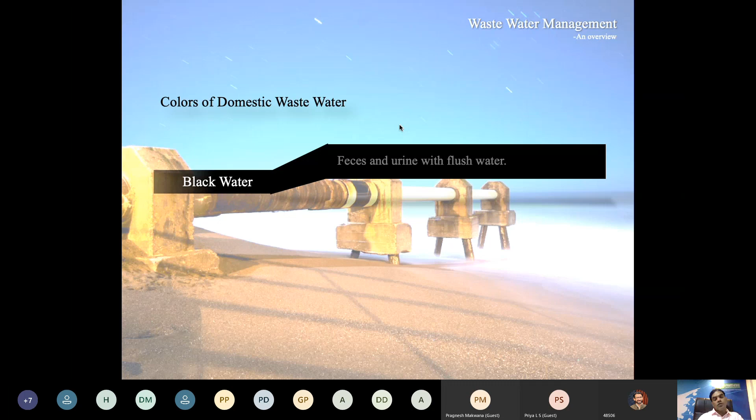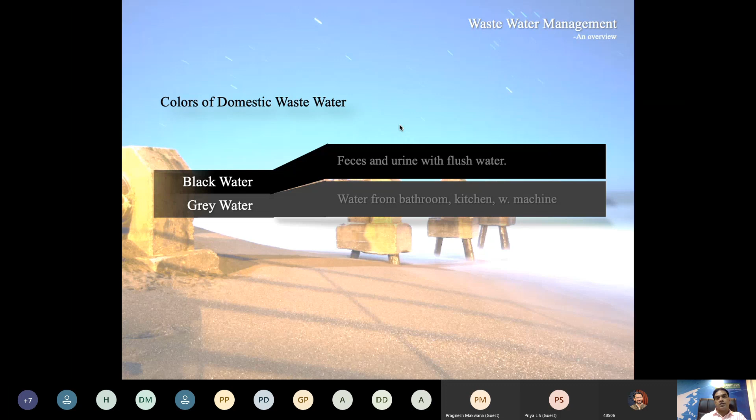These are the types of domestic wastewater. First is black water, which is nothing but WC water, wastewater that comes from the WCs. Then grey water, which is water from the bathrooms, kitchens, and washing machines, basically utilities. Then comes yellow water, urinal water from urinals. Then brown water, which is black water without urine or yellow water. In an STP or treatment of wastewater, we treat all these things - black water, grey water, yellow water, and brown water - everything in the STP commonly.

Whereas as per NAINA authority, the new authority in Panvel area, as per their restrictions, we have to treat black water and grey water separately. Whereas in BMC and other areas, all this water is treated together in the same sewage treatment plant.

See, these are the levels of domestic wastewater parameters: BOD, COD, organic nitrogen, ammonical nitrogen, total nitrogen, phosphorus, total solids, and suspended solids.

If you see these figures, these are strong, medium, and weak.

Whereas to design the plant, we always consider some ballpark figure, like the two important figures are BOD and COD. We always consider BOD in the range of 300 ppm and COD in the range of 600 to 700 ppm to design the plant as an average value of strong, medium, and weak.

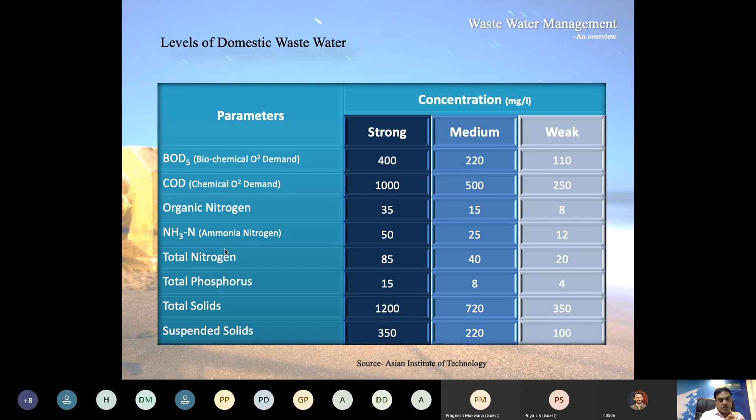Now, what is COD and BOD? Why have we taken only two parameters? The reason is these are the only two parameters which are very essential to treat. If you treat COD and BOD, everything can be taken care of easily and automatically.

First is COD, chemical oxygen demand. It is the measurement of chemical in the water that can be oxidized. What we are doing in STPs or treatment of wastewater is treating it with the help of bacteria, growth of the bacteria, that is nothing but oxidization. So COD is the total chemical present in the water which can be oxidized, which we are oxidizing in the STPs.

Whereas BOD is biochemical oxygen demand, which measures the amount of food that bacteria can oxidize. This is the real BOD which we oxidize in the aeration tanks or MBBR tanks with the help of aeration and giving proper oxygen to the bacteria.

As far as measurement is concerned, COD can be measured with a very simple method in any laboratory, in just 2 hours. Whereas BOD will take 3 to 5 days. There are two types of BOD measurement: BOD 3 days and BOD 5 days. But normally, to get the exact figure, always go for the BOD 5 days. That is the reason when we give any sample to any laboratory, it takes a minimum of 5 days to get the results, because BOD itself will take a minimum of 5 days for measurement.

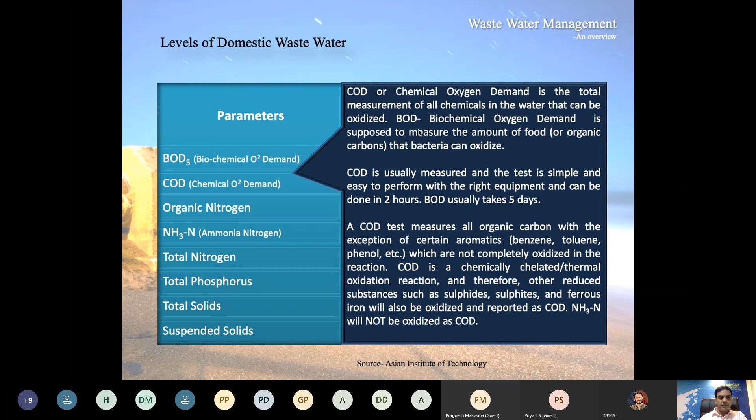Now, wastewater problems in India. Our country is having problems all the time.

Speaking of Mumbai alone, we have almost 77 lakh 30,187 people who don't have adequate sanitary facility. These people who live in slums generate around 1739 MLD of wastewater per day. Again, there is a norm of 225 liters per day per person. The disposal of this untreated domestic water is a huge task.

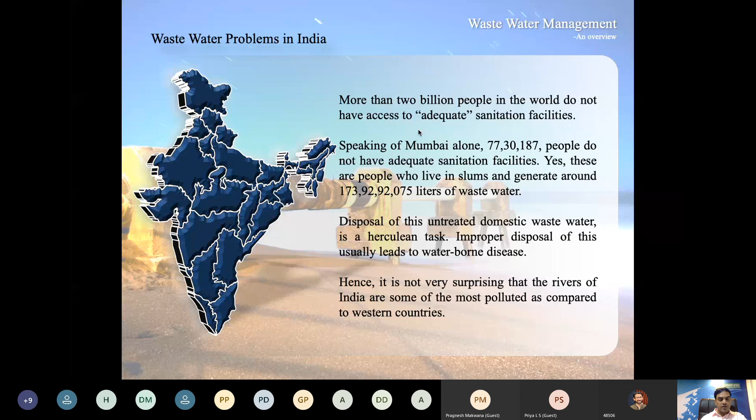Improper disposal usually leads to waterborne disease. All these slums don't have a proper drainage system, so there is no treatment. All this water goes into nalas and rivers, and ultimately that contaminates us and creates a lot of diseases.

You can see the pictures. This is a river, a nala.

India lacks infrastructure. As per CPCB estimation in 2006, India generates 33,212 MLD of sewage per day. But we installed only 6190 MLD of sewage treatment plants across the country. So we are treating only 20% of the wastewater generated; the remaining 80% again goes through these nalas and rivers and all.

Even this treatment capacity is confined to bigger and more powerful towns of the nation, like New Bombay and Bombay, where a lot of STP plants came up, because the New Bombay corporations and big corporations have a lot of funds. So they can put big STPs, lay bigger combined pipelines, and take it to common sewage treatment plants. Whereas in smaller cities, they don't have funds and proper infrastructure, so again there is a big problem.

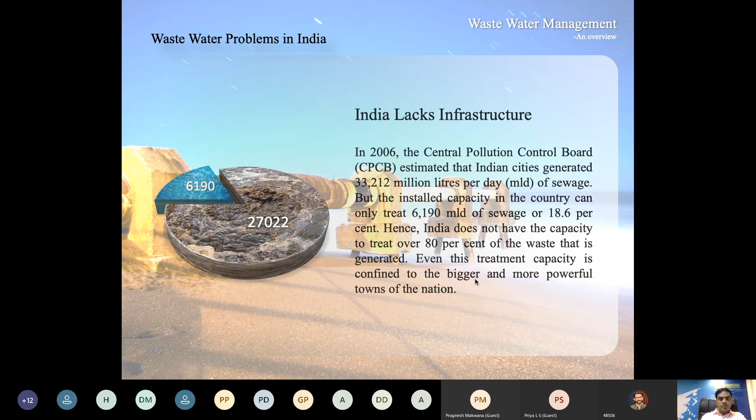Again, this is one more big problem: unavailability of correct data. No one really knows how much sewage is generated. It's very surprising that after 1947, after freedom, after 75, 80 years, we don't have perfect data on which to design the system.

It is well known that 80% of all the water consumed by a city is released as untreated wastewater. So it should be easy to calculate how much wastewater is generated by simply looking at water consumption. Unfortunately, that doesn't work in our case. The government estimates 70 to 80% sewage generation of the total water supplied, as a thumb rule.

For example, BMC only provides 90 liters of water per person for domestic purposes, and the remaining water you are forced to arrange on your own, and you probably wouldn't have control over that.

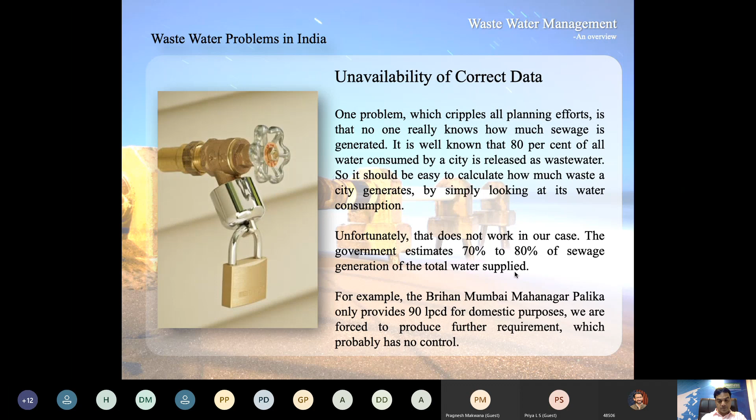It's a case study. According to Delhi Jal Board, the city generates 2947.8 MLD sewage in 2005. This was based on the quantum of water supplied. But when CPCB measured wastewater flowing through Yamuna, it found the discharge is 3684 MLD, which is 700 MLD higher. So both Delhi Jal Board and CPCB are government firms, but they don't have proper data, and data is also not matching to each other. The difference is 700 MLD. It's a very high figure.

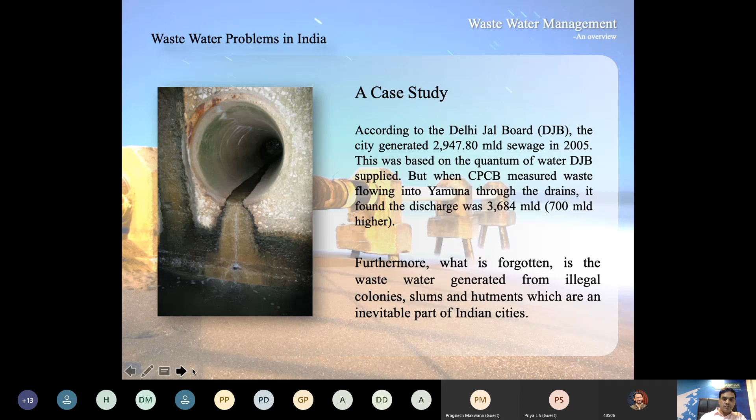Deteriorating infrastructure. The problem is further complicated when we realize that installed treatment facilities like septic tanks and STPs do not actually end up treating the wastewater. This is a common problem now. In a study conducted along with the BMC, it was found that majority of the septic tanks used were either not working well or just functioning as sewage collection tanks. The reason is a septic tank needs to be cleaned every 6 months or 1 year, but nobody bothers about that. So it gets treated as a collection tank, and after overflow, we pump it out. There is a lot of smell and sewage flowing through roads.

Problem number 3. Majority of the toilet blocks use septic tanks due to unavailability of street sewers in the vicinity of slums. By this, I don't mean that septic tanks do not work. In fact, septic tanks are a very good option in the absence of municipal street sewers, but only on the condition that they were constructed properly and used according to the guidelines laid down for them. In slums and everywhere, septic tanks are there, but they are not properly designed or maintained. That is again creating a lot of problems like health diseases and environmental issues.

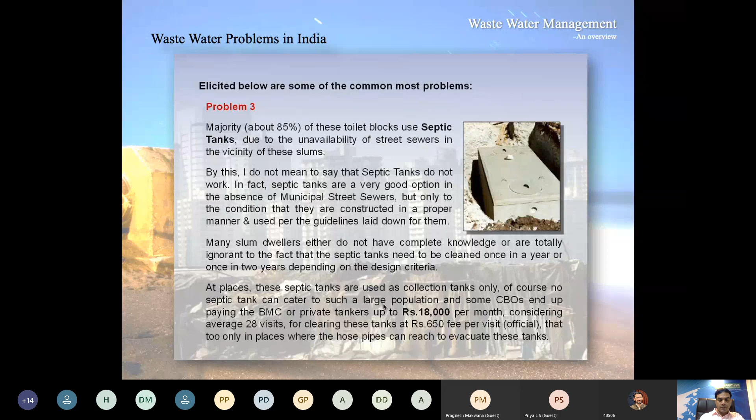STPs are usually located where land is available. As a result, sewage has to be transported long distances from the source of generation and collection to the treatment site through a conveyance system. In short, electricity is used to run the pumps for this. Also, most cities lack a functional drainage system to convey the waste. It is equally important to note that the longer the distance, the more the cost of conveyance. The infrastructure available in STPs includes laying the pipeline, operating the system, spending on operation like electricity and manpower, and maintaining it for a longer time. After a particular time, you have to again repair or refurbish it. That is also a lack of infrastructure.

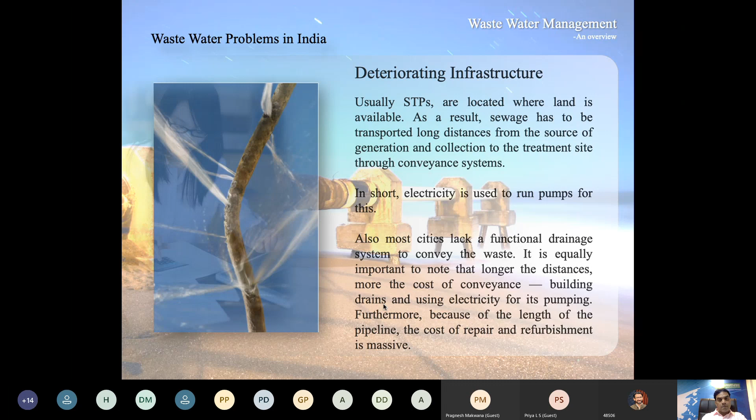You can easily understand with this arithmetic. Sewage generated across India is 33,212 MLD. Capacity to treat available is 6190 MLD. Actually treatable is 4469 MLD, which is 72%. So 28,743 MLD is not treated. The annual cost of treatment of 6190 MLD sewage is approximately 135 to 677 crores annually. The capital cost required to build STPs for the remaining untreated water, that is 27,022 MLD, is 7,566 crore, considering 28 lakhs per MLD as the approximate capital cost. 7,566 crore rupees is a big figure, and to arrange these funds, plus the annual cost of treatment which is around 700 crores, it is very difficult to maintain these centralized systems.

So what we always recommend is to go for decentralized systems. Decentralized systems can be easily operated and maintained because they are operated by society, corporates, or industries.

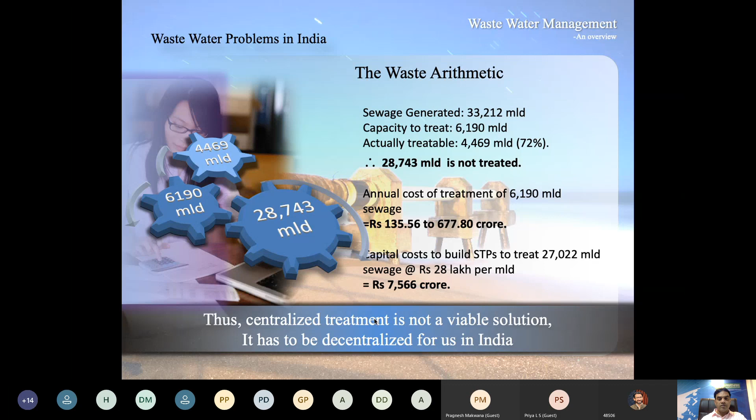So we're coming up to the different systems available for the treatment of sewage. As far as decentralized systems are concerned, first is the septic tank, which is commonly known to everybody. It is the most commonly used wastewater treatment for low-cost housing applications, since most septic tanks can cater to a population of up to 300 people. It's often confused with cesspools, and it works on the principle of anaerobic microorganism digestion.

This is a septic tank, as you have seen. First, sewage comes in by gravity. There are two baffles, and it passes through the baffles. In the first phase, the sewage sludge sediments, and semi-clear water flows through to the next chamber for further sedimentation.

This is a common septic tank figure. We have to remove this sedimentation or sludge on a regular basis, like 6 months, 1 year, or 2 years, depending on the load.

And finally, it goes to a soak pit here. This is again a big problem. If we don't have a proper soil strata which can soak this sewage, then it doesn't soak the sewage and it comes back, and the septic tank overflows. So while designing the system, we need to take proper care of the design of the system, the soil strata, the location of the septic tank, and the removal of sedimentation or sludge on a regular basis. Otherwise, it doesn't work properly.

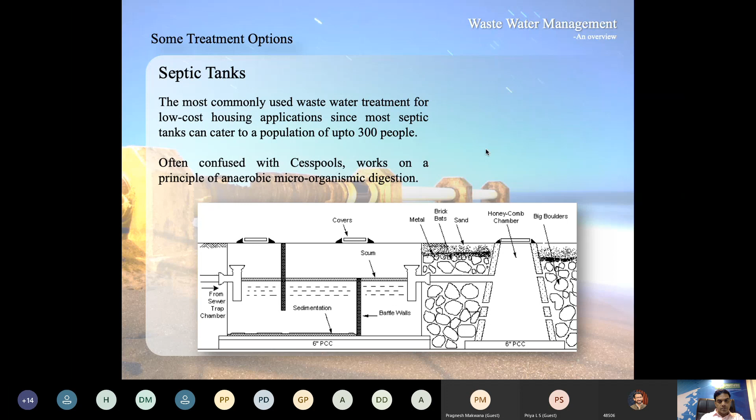Septic tank advantages: this is a very age-old established technology, underground so invisible, not visible. Pathogens removal is very good. No power supply required - this is the most important point, and it's working very nicely. The reason is it doesn't have any operating costs, especially in slums and low cost areas. It's very effective because they cannot afford to pay for operators, power supply, chemicals and those things.

Negatives: treatment is only primary. If you are supplying a BOD of 300 at the inlet of the septic tank, at the outlet you will get approximately 150 BOD. Whereas in other STPs like MBBR and other aeration systems, inlet is 300 and outlet is less than 10 ppm, which can be used for flushing. Whereas septic tank outlet we cannot use for flushing or any other purpose because it is only primary treatment.

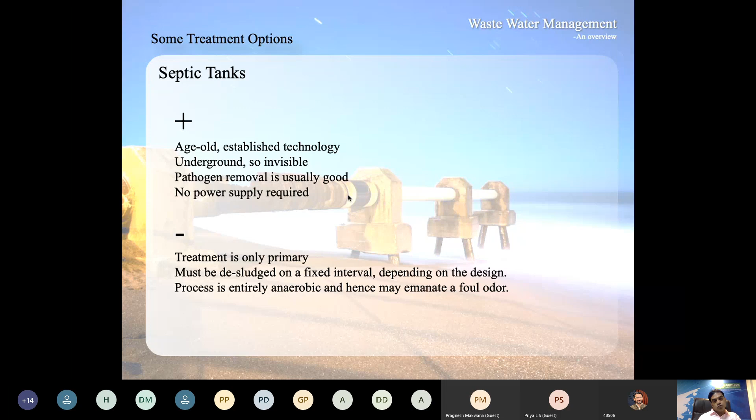It must be desludged at fixed intervals depending on the design. This is very important, otherwise it creates a lot of smell and overflow. The process is entirely anaerobic and hence can emanate a foul odor - this is an anaerobic system. All the bacteria are anaerobic bacteria. Treatment is completely anaerobic, that is the reason there are chances of foul smell if it's not maintained properly.

Then comes a very old conventional system called DEWATS. DEWATS is based on different natural treatment technologies put together in different combinations according to the need. I'll explain.

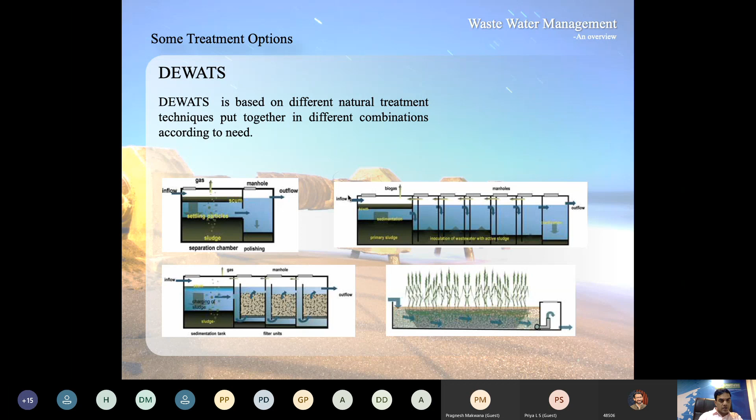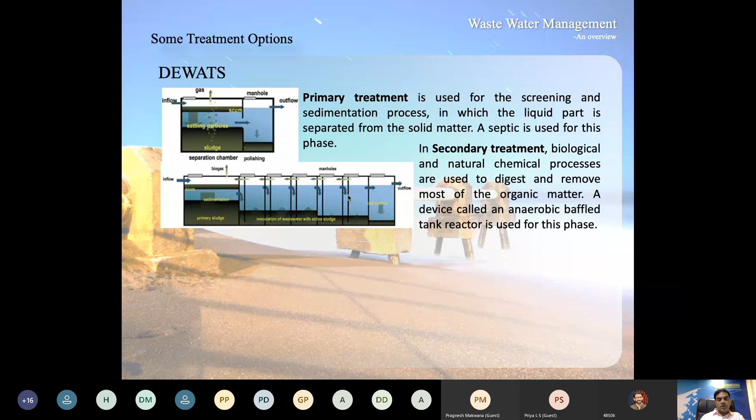In DEWATS, first is primary treatment, used for screening and sedimentation process, in which the liquid part is separated from the solid matter, and a septic tank is used for this phase. In secondary treatment, biological and natural chemical processes are used to digest and remove most of the organic matter, using a device called the anaerobic baffled tank reactor.

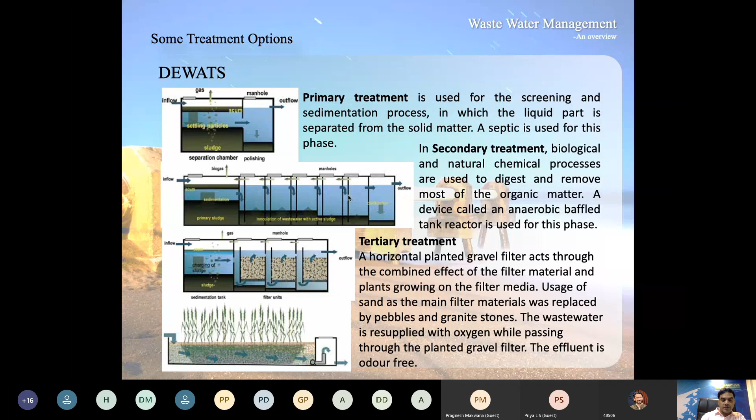Tertiary treatment is a natural system, so instead of a sand filter and carbon filter, there are natural gravel filters that work through a combination of different layers of sand and semi-clay. Water passes through pebbles, granite, and stones, and through this process the water gets cleared. This video will help you easily understand how the DEWATS system works.

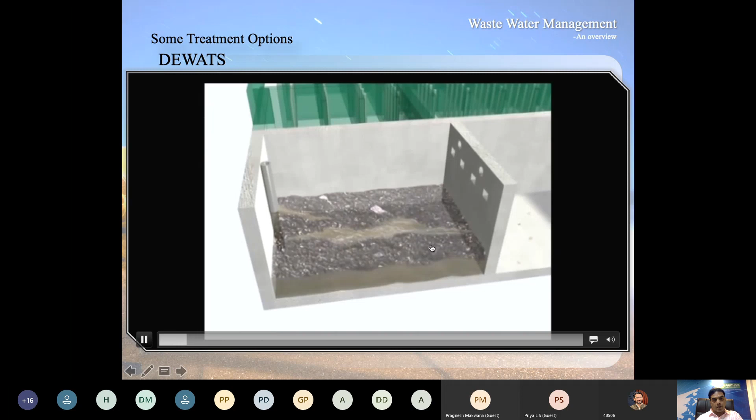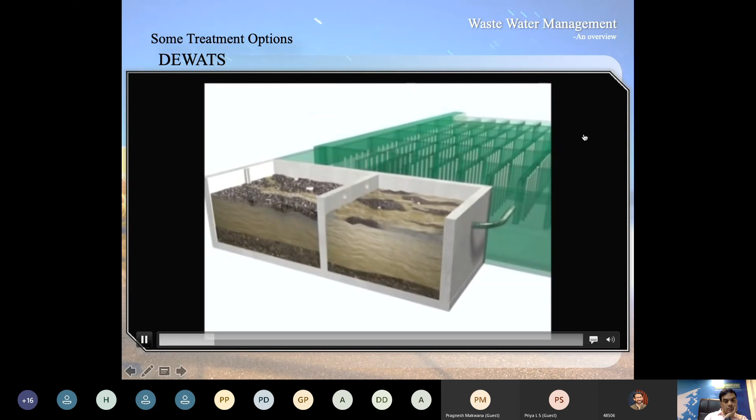The first stage is the settler tank. Here the contaminants are retained by flotation and sedimentation, which happens through natural separation of heavy particles. The heavy particles sink down and lighter particles float.

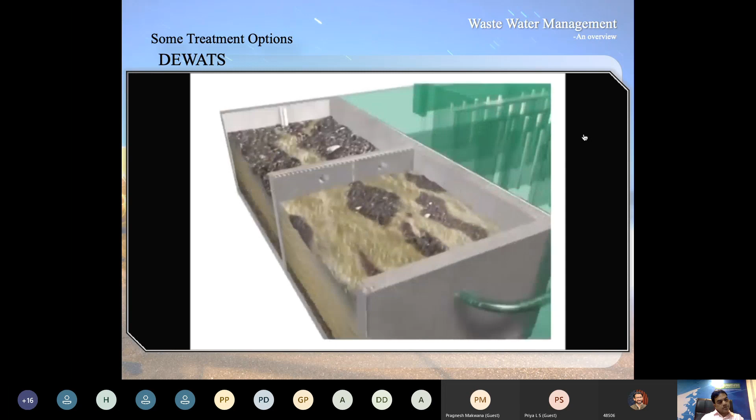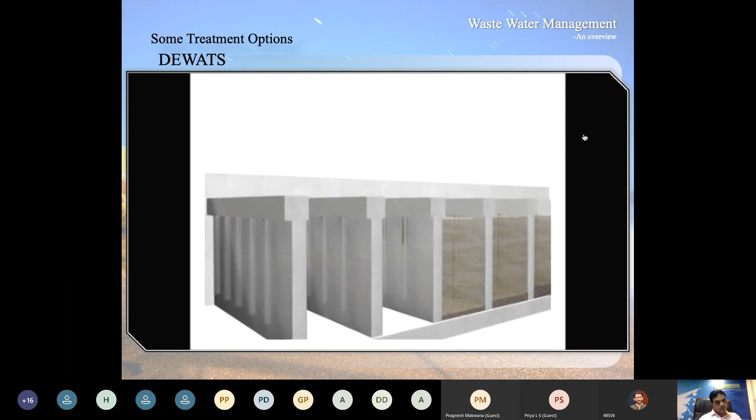Second stage is the baffled tank reactor. In these tanks, anaerobic treatment takes place based on metabolism of specialized bacteria, which transform the organic pollutant into bacterial matter. During this process, the fresh effluent is mixed with an active sludge blanket deposit of microorganisms occurring naturally at the bottom of the chambers. During this progression, the accumulated sludge is gradually reduced. At this stage, average BOD reduction is about 75%.

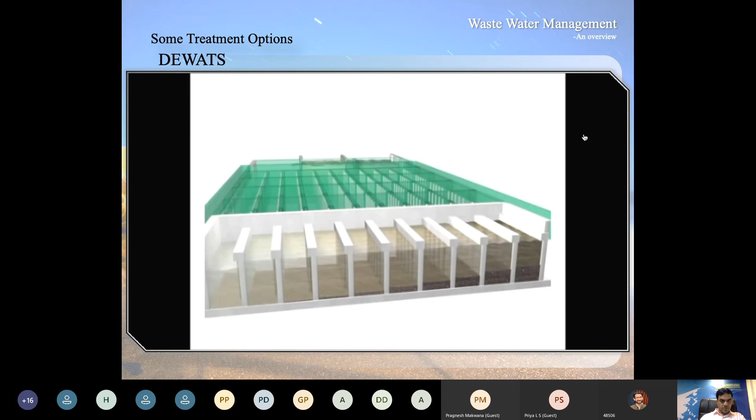What are the advantages of DEWATS? High treatment efficiency, customizable as per the treatment requirement, beautiful landscaping possible - this is very important, no waste water above ground, no nuisance of water. Basically, these DEWATS systems are very good and useful where a lot of land is available.

These are the negatives: high space requirement, 30 square meters per cubic meter of daily flow - 30 square meters for 1 cubic meter of daily flow. Costly if desired gravel is not available, because since it's a gravity filter, it needs a very high quantity of media. Intensive maintenance and supervision is required during the first 2 years.

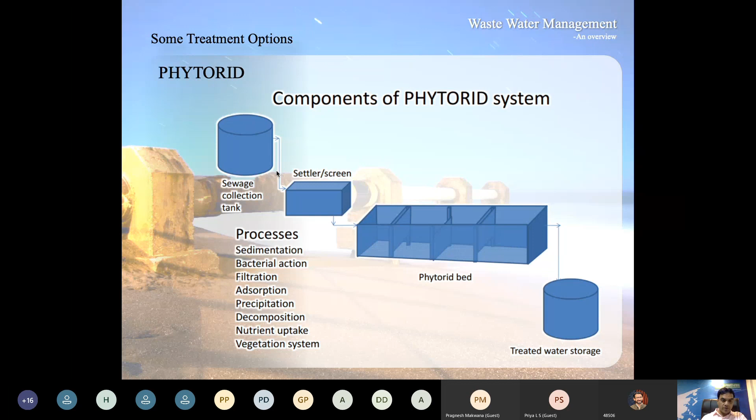Another technology which is natural and very good is Phytorid technology. These are the components of the Phytorid technology. The processes are: sedimentation, bacterial action, filtration, adsorption, precipitation, decomposition, nutrient uptake, and the vegetation system.

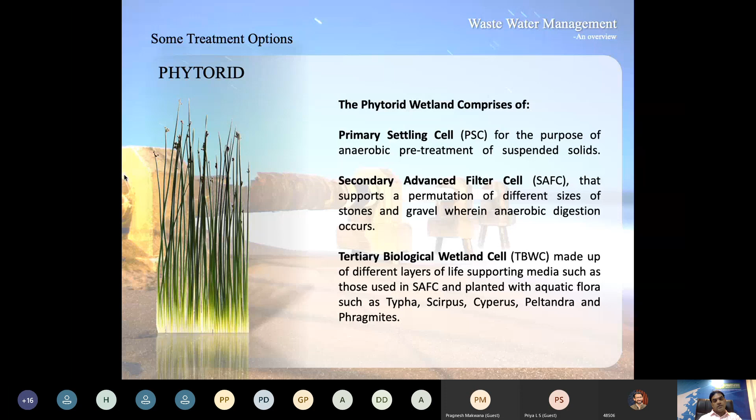This phytorid wetland comprises a primary settling cell for the purpose of anaerobic pretreatment for suspended solids, a secondary advanced filter cell that supports a permutation of different sizes of stones and gravels wherein anaerobic digestion occurs, and last a tertiary biological wetland cell made up of different layers of life-supporting media, such as those used in SAFC, and planted with aquatic flora such as Typha, Scirpus, Cyperus, Peltandra and Phragmites.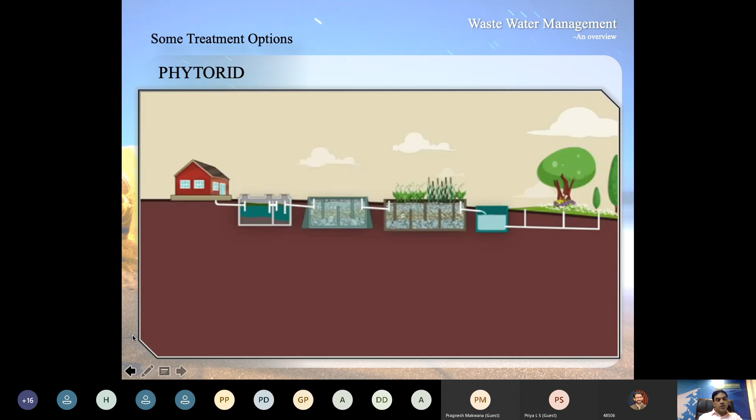You can go through this video so you can understand better what the phytorid system is. This is the primary cell, this is the secondary filter cell, and this is the tertiary biological wetland cell. These are some plants they planted above these gravels.

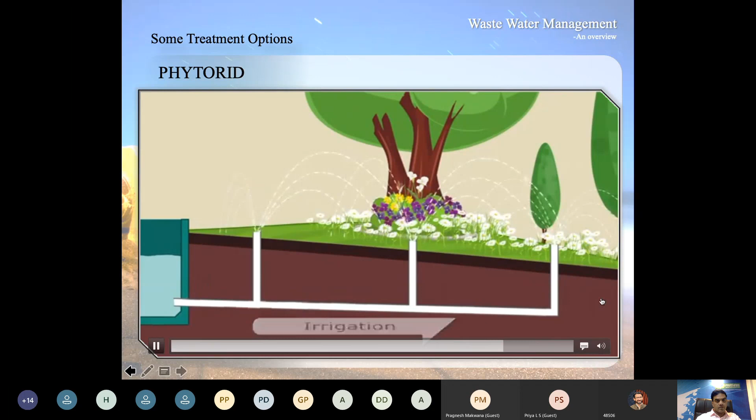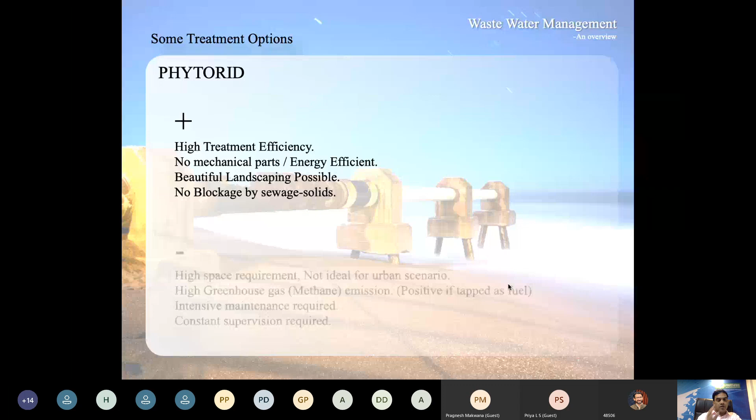I told you the advantage is high treatment efficiency. No mechanical parts, complete, no pumping at all. Everything is natural, so energy efficient. Beautiful landscaping possible, no blockage by sewage solids.

Negative point, or disadvantage you can say, is high space requirement. Again, it's a natural system, so there's no mechanical pumping, so you need more space. Not ideal for the urban scenario, especially areas like Bombay and metropolitan cities.

High greenhouse gas, methane emission. We have to keep a close watch on this methane gas emission, and we have to control it. Otherwise, it can create a problem.

Intensive maintenance required. Constant supervision required.

Then comes soil biotechnology, you can say SBT. The soil biotechnology system consists of an impervious containment, typically 1 to 1.5 meter below ground.

Organic wastewater is processed in an ecosystem consisting of soil-like media. This is media: bacterial cultures, geophagus earthworms, natural mineral additives, and select plants. Natural mineral additives are used as a process regulator in order to achieve desired treated water quality, which is nothing but, you can say, cultures. We normally call them cultures in normal language.

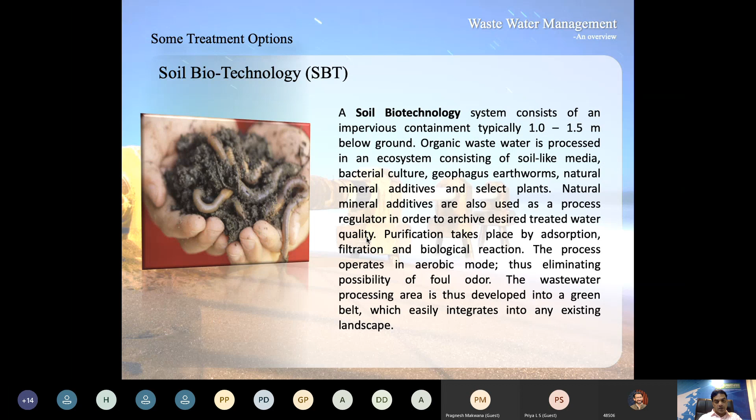This composition of patented soil biotechnology: first is plantation as indicators of plant's health. Additives, that is high performance enzymes, we are adding it. Cultures, microorganisms, media, specific mineral, rock, stones, soils. So all this wastewater passes through these 4 layers and then comes out as treated water.

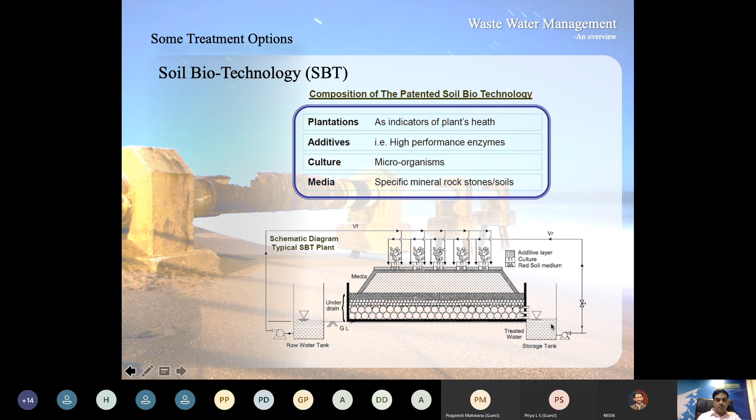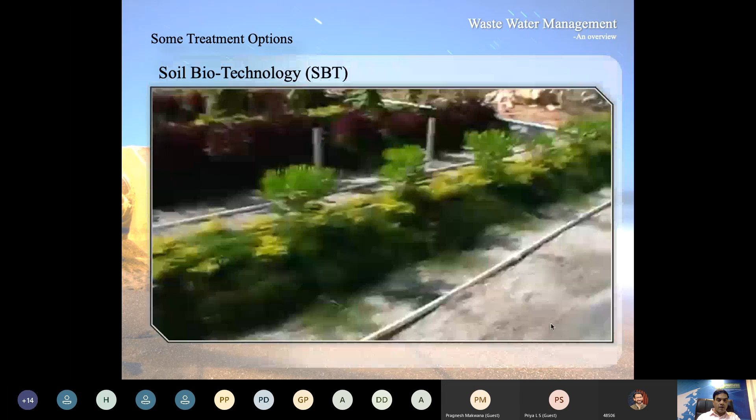This is the common schematic flow diagram of the soil biotechnology. You can see this. In keeping with the theme of decentralized development, a new wastewater treatment technology is on the horizon, one that may hold some of the answers. Soil biotechnology sewage treatment plant is an indigenous wastewater treatment process that uses nature's processes to purify water.

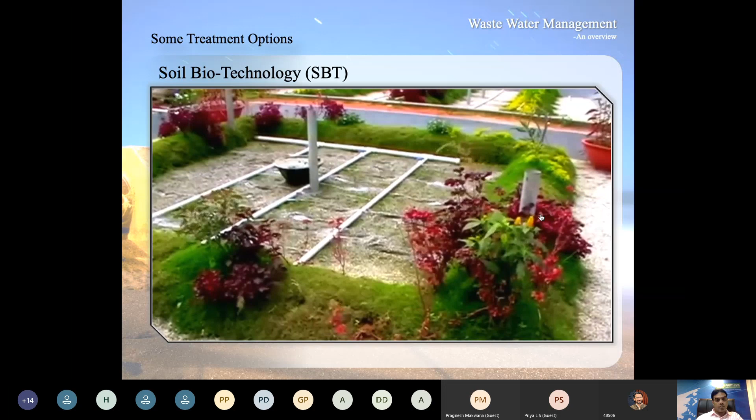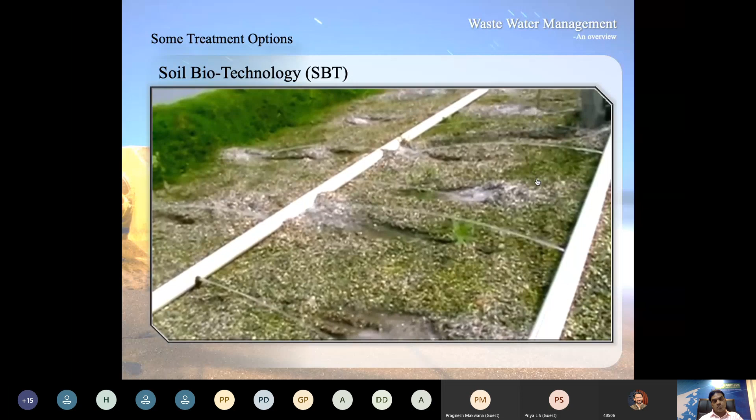Professor H.S. Shankar and his associates from the Chemical Engineering Department at the Indian Institute of Technology, Bombay, developed this technology. The institute has also received a patent for this technology from both the US and the Indian patent offices.

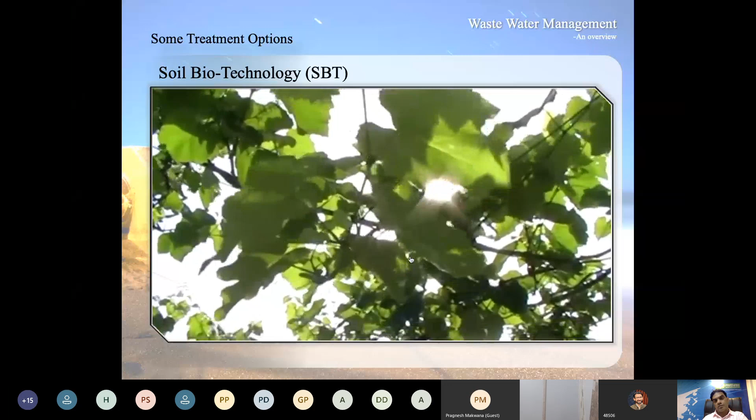Here, nature's fundamental actions of respiration, photosynthesis, and mineral weathering purify the water. The filtering equipment of a soil biotechnology plant is called a bioreactor. The construction involves digging of a trapezoidal trench which is reinforced with riprap.

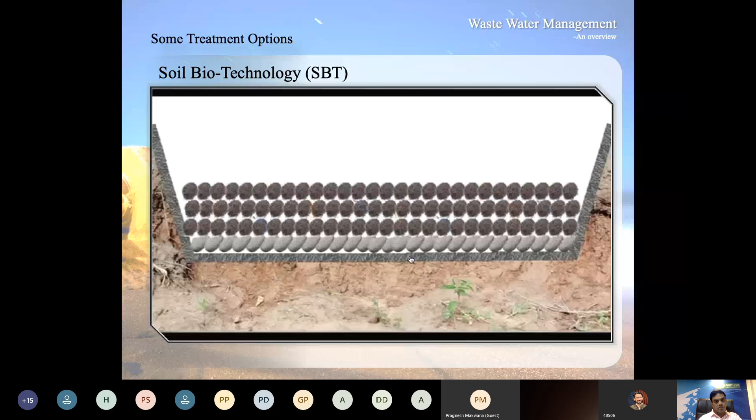A layer of rubble is added, above which a proprietary culture of soil, earthworms, and bacteria are added and covered by another layer of rubble. Over this, rows of plants are laid, in between which rows of pipes are laid. The sewage water is sprayed through the pipes and is filtered as it trickles down this bed.

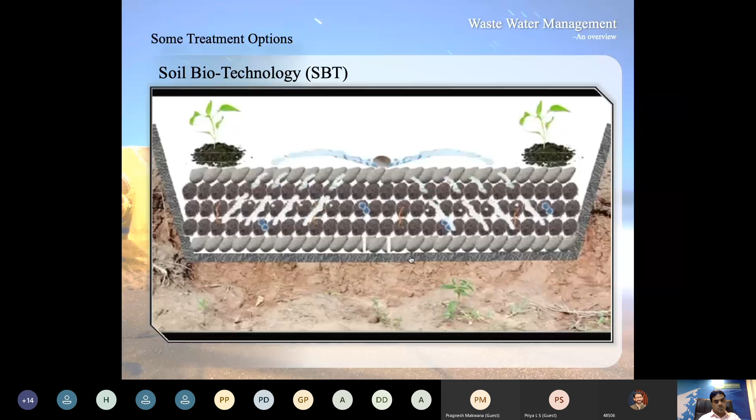Positives or advantages of the SBT technology: high treatment efficiency, again low carbon footprint as compared to other technologies like DEWATS. Low energy consumption since there is no pumping, it's completely gravity flow. Beautiful landscaping possible, as you see in the video.

And disadvantages are: open system, hence some odor may be possible. Distribution lines can get clogged, which need to be cleaned regularly. Regular maintenance required, both flora and fauna of the system need regular supervision.

This is one more technology, SIBF, solid immobilized biofilter, is nature's way of handling wastewater and based on ecological engineering. SIBF houses the ecosystem developed for the specific requirement of wastewater treatment.

The wastewater is processed by this ecosystem, which converts the impurities trapped in the biofilters into stable components, followed by a polishing tertiary treatment. The final treated water meets the pollution control norms and can be used for gardening, irrigation, construction, and toilet flushing purposes.

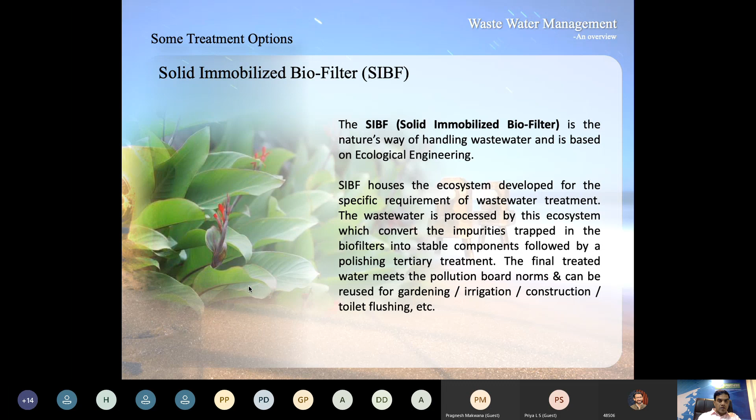This is the complete flow diagram of this system. You can see here, for primary treatment, you can say screening and all. We're pumping this sewage to biofilters, biofilter 1, then biofilter 2. This is the tertiary treatment.

This is the collection tank, biofilter 1, then pumping, biofilter 2, and then this is the alum tank for coagulation, and this is a tertiary treatment of sand filter and carbon filter.

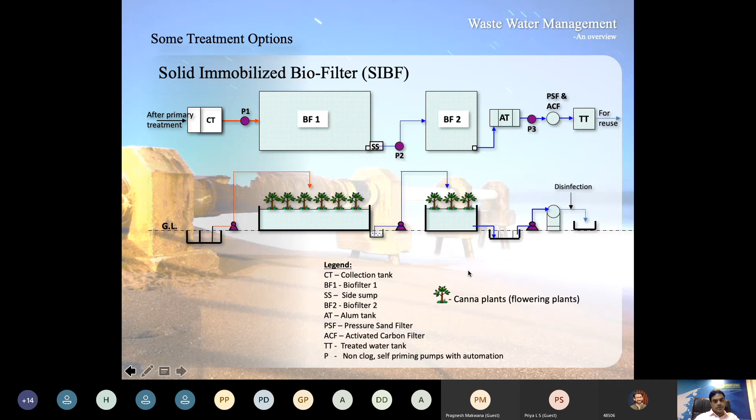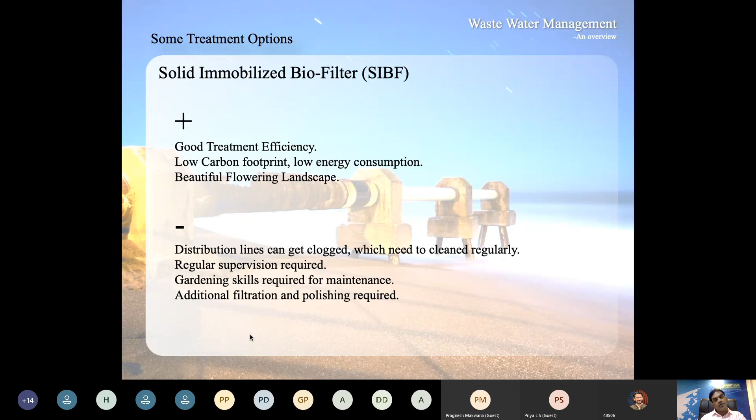The advantages of SIBF technology are good treatment efficiency, low carbon footprint, low energy consumption, and a beautiful flowering landscape. Disadvantages are that distribution lines can get clogged and need regular cleaning, regular supervision is required, gardening skills are required for maintenance, and additional filtration and polishing is required, as we have provided sand and carbon filter there, as well as disinfection at the tertiary treatment.

Now we are coming to systems which are majorly used in decentralized systems, especially in cities like Bombay and major metropolitan cities, where land is the biggest problem. We have always provided the smallest area possible for the STPs. We don't have space even for a small car. So land cost is very high. That is the reason all these decentralized systems are very, very important, especially for the region of Bombay and the metropolitan cities.

The first technology is membrane bioreactor, popularly known as MBR technology. This MBR is designed to produce high quality treated water from wastewater. It is available in standard and customized modules to treat domestic sewage and industrial effluent. Basically, this is membrane technology. The treated water available through this MBR is crystal clear water, as good as drinking water, because it passes through semi-permeable membranes, which are very costly.

You can see this video. This is basically a Singapore-based video. The total Singapore is operating on NEWater, which is completely recycled water from the sewage.

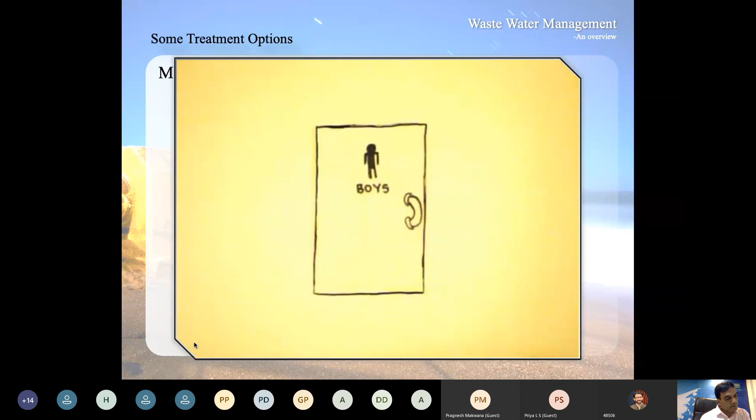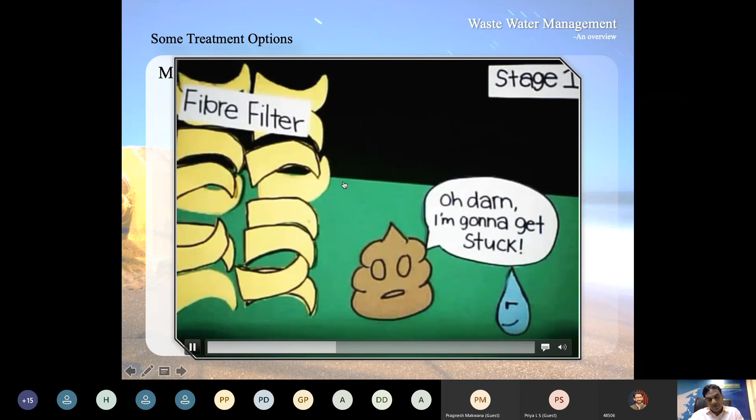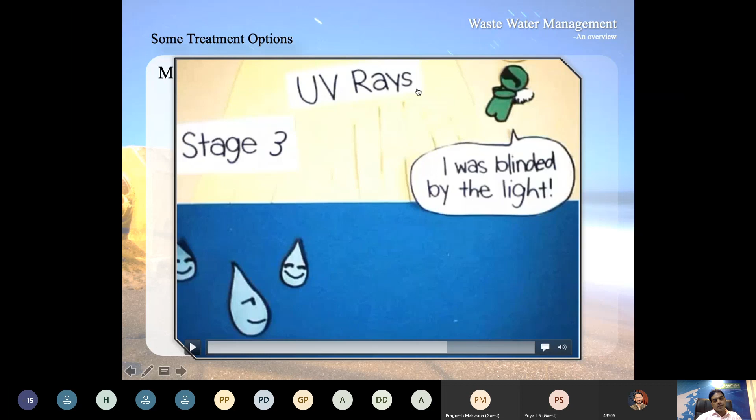Purushottamji, I'd just like to add one thing here, sorry to interrupt. I visited one of these NEWater centers in Singapore, and it's an amazing state-of-the-art facility, the NEWater plants in Singapore. So yeah, what you've shown is exactly the way it works. Of course it's shown in a very simplified way, but yeah, it's an amazing process basically which has been shown here.

Chintan, you can add your thoughts about NEWater in Singapore, please. Actually, regarding this NEWater, one more thing is that I was there for the World Plumbing Council scholarship, and my twin daughters were very young then. One of the daughters is very finicky about the taste of food and water, so she was the one who did not like any kind of bottled water we would give her, be it Dasani, Evian, or whichever brand we could come up with. She was not liking that. I had a few bottles because NEWater is also produced as bottled water, they give you bottled water kind of thing. And my daughter took to NEWater so much that she liked it better than any other bottled brand. So you can imagine the quality of treatment this water has.

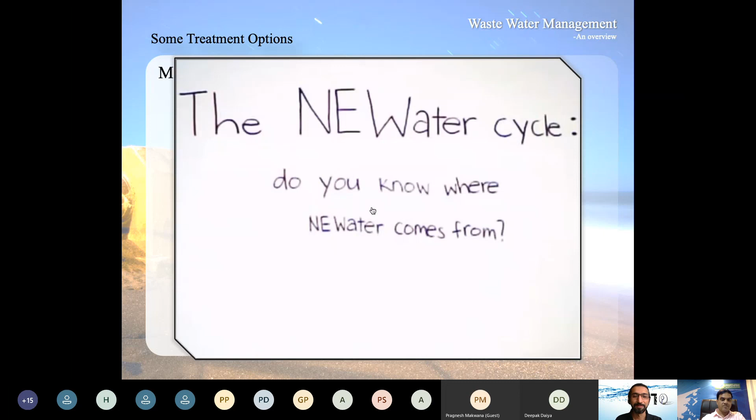So yeah, please Purushottamji, continue. The advantages of this MBR technology are low energy consumption, compact system, because the aeration tank is very small. You only need membranes to treat the system, and the area required for the system is almost 50% of what is required for the SBR system or normal systems. No chemical requirement, single packed automatic unit, minimum civil work and pre-treatment, and consistent water quality. This is really a very good system because the treated water you get is as good as drinking water.

But disadvantages of the system: expensive membrane modules need replacement after 10 years or so. This is a major drawback of the system, especially in our country if we want to use it on a regular basis on a large scale. The membranes are imported and very costly. You need to replace the membrane after every, say, as per my experience, 5 to 6 years, which is a very big cost that cannot be afforded by societies or even by some profit entities.

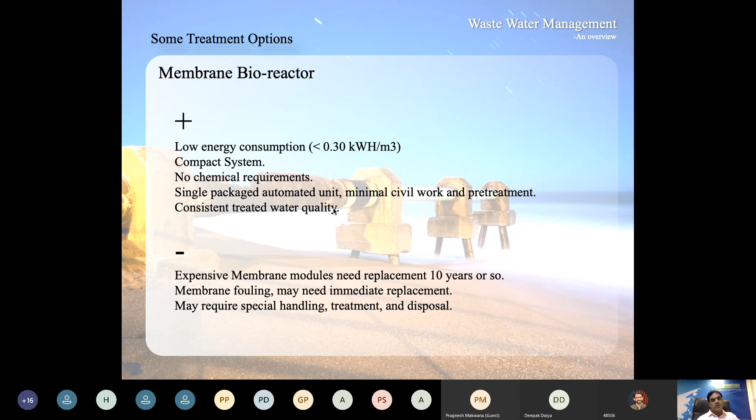Now comes the most popular system nowadays. 95%, or you can say 98% of plants, where we're putting in Bombay, is based on the MBBR system. This moving bed bioreactor, or fluidized aerobic bioreactor, is based on the concept of attached growth.

In the olden days, you can see a lot of treatment plants with open aeration tanks, big surface aerators, big clarifiers, and all those things. But over the last say 30, 40 or 50 years, space constraint has become the biggest problem.

So what we have done in MBBR technology is nothing but the old activated sludge process, but by adding some media which is used for attached growth in the aeration tank and some settling tank, we have reduced the volume of the tank to almost 50%. That way, we are saving the space required for the STP plant. But the basic principle is the same, activated sludge process. We added a media called the MBBR media, which acts as an attached growth medium in the aeration tank.

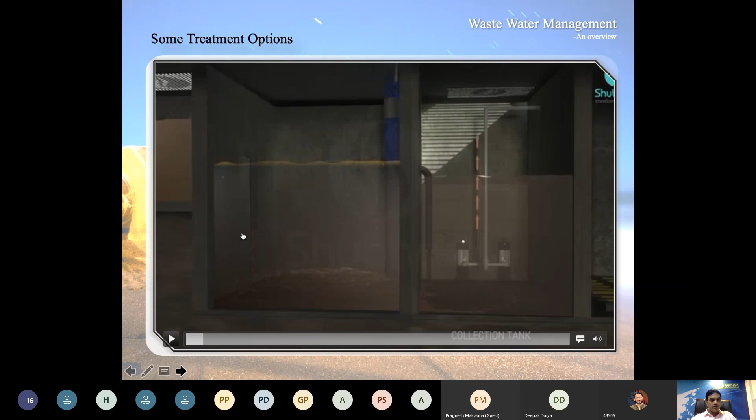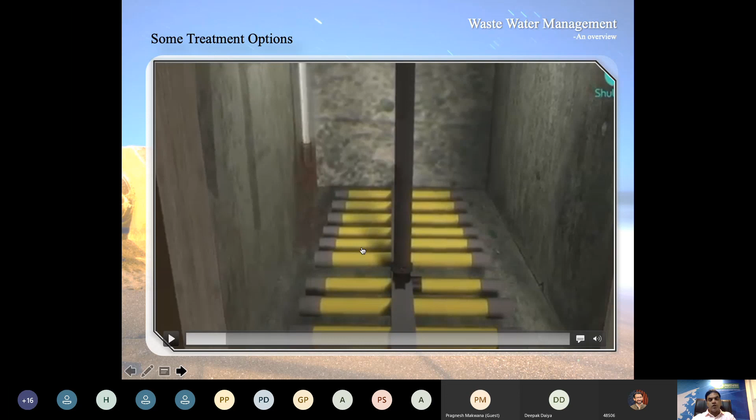This is the collection tank where sewage is coming, raw sewage. From the collection tank, we're pumping the sewage to the MBBR tank, where at the bottom we're putting air diffusers to give diffuse aeration, so that we can get more oxygen for bacteria to grow.

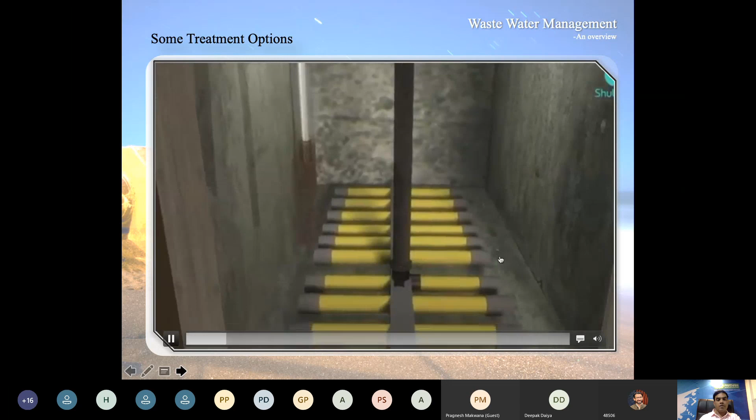This is the media which we are using to increase the surface area of the aeration tank.

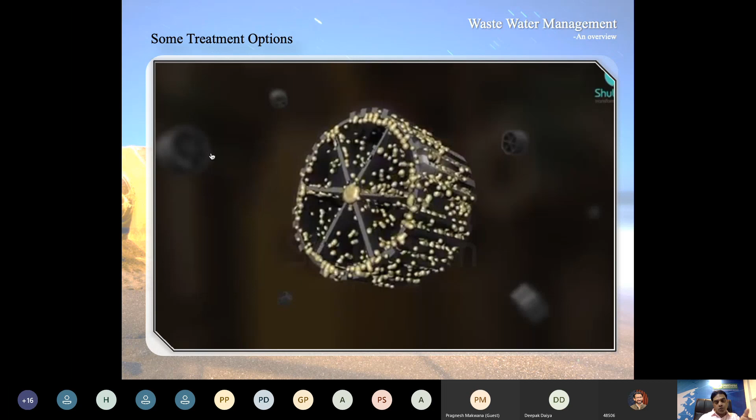What is the media? This is a media, round in shape. You can see this surface area, this attached growth system. This media is covered with a lot of bacteria and gives more surface area for bacteria to grow.

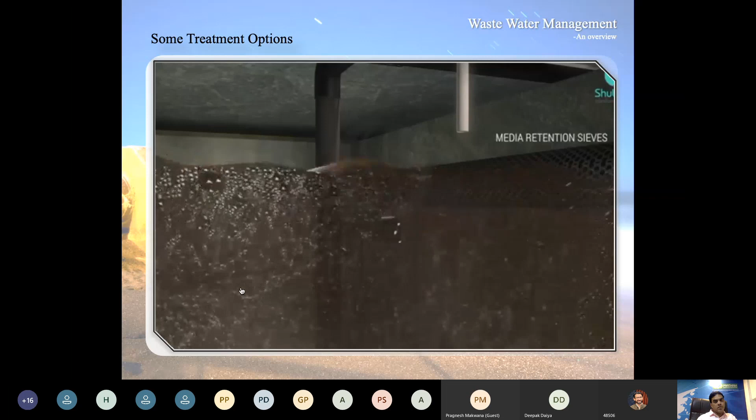After aeration in the MBBR tank, it goes through a settling tank where all the sludge settles, and the semi-clear water goes for further tertiary treatment.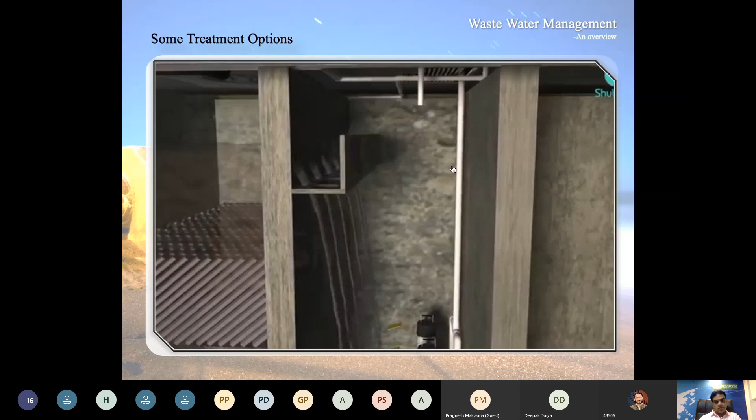MBBR system advantages: no moving parts, wide treatment range, can be added in modules, elimination of skilled monitoring, totally closed system for small capacities, and no sludge recycling required.

Hello, are you getting this? Purshottam, we can hear you. Yeah, we can hear you.

So the MBBR system, as I said, is the most popular system. The only reason is it needs less space, less capital cost, and less operating cost, because you don't need skilled manpower, and don't need the high cost of membrane replacement and all those things. That is the reason nowadays 95% of plants are MBBR based plants.

The disadvantages are height restriction. The minimum height required is about 5 meters. It may increase civil and structural work if installation is planned in a basement.

It may require consistent inflow of sewage or wastewater. We need at least 25 to 30% of the design capacity to operate the system, to maintain the biological system. Otherwise the system doesn't work, because it doesn't get food on a regular basis for bacteria to grow.

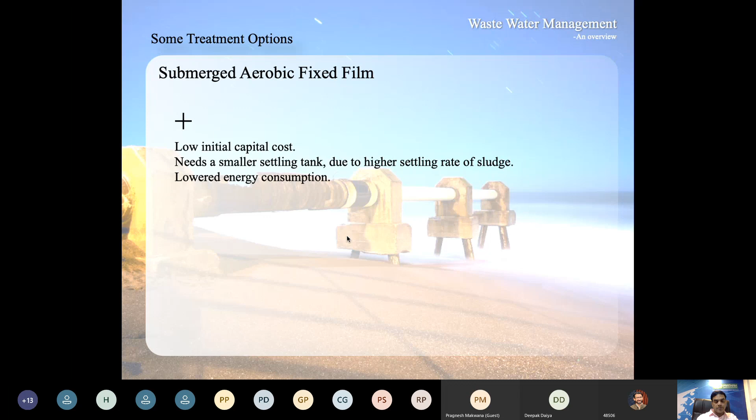Disadvantages require skilled monitoring, and choking of media, which is very important. If you see the media shape and figure, these are basically PVC sheets stuck together. The height of one block is 700 millimeters, 1.2 meters by 700 millimeters, and it is submerged in the water.

If you want to repair the diffuse aeration or diffuser at the bottom of the aeration tank, you have to remove the complete media, which is very difficult because it's a block filled with a lot of sludge. So it's a big task to remove that for maintenance. That is the biggest drawback of the system.

That is the reason everybody is now going for MBBR in place of the SAF system, because in MBBR the media is floating, so you can easily do maintenance for the aeration system, whereas in this case it's a big task to remove it and put it back.

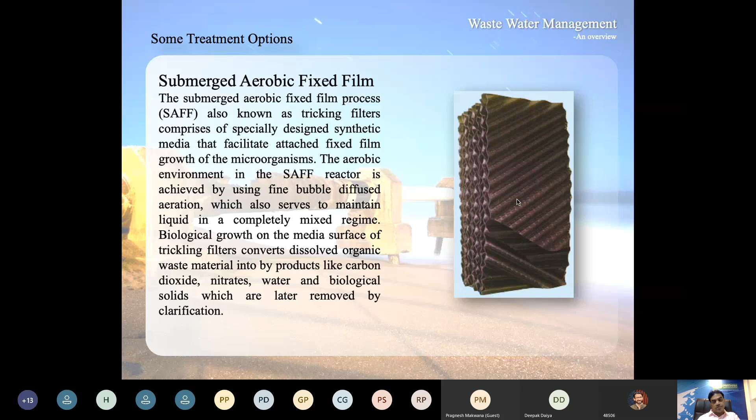Then comes the sequential batch reactor. If you see all the municipal corporation plants nowadays, all over Maharashtra, maybe in India also, 99% of plants are based on the SBR system. If you have visited any new plants installed in the New Bombay area, like Vashi, Nerul, Belapur, all are based on SBR technologies.

SBR is sequential batch reactor. It is an activated sludge process. The SBR reactor treats wastewater such as sewage or output from anaerobic digesters or mechanical biological systems. Again, there are diffusers at the bottom to give oxygen to the bacteria.

If you go through this system, there are 5 stages of treatment: fill, react, settle, decant, and idle. One cycle is 6 hours. If you fill the water in the first cycle for 2 hours, it takes 6 hours for the first cycle. That is the reason there are always 2 SBR tanks, so that when one tank is filling, the other tank will decant.

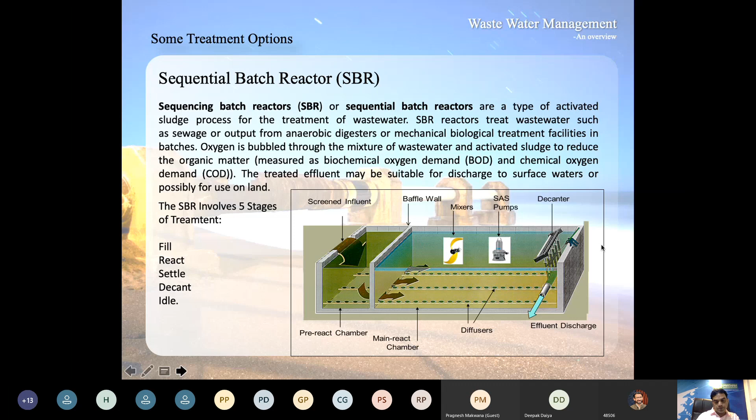So start the filling. Fill, air on phase. Then we have only the aeration phase for say 1 or 2 hours. Next phase, aeration is off and we keep it idle for settling for say another 1 to 1.5 hours. You can see the sludge is settling down.

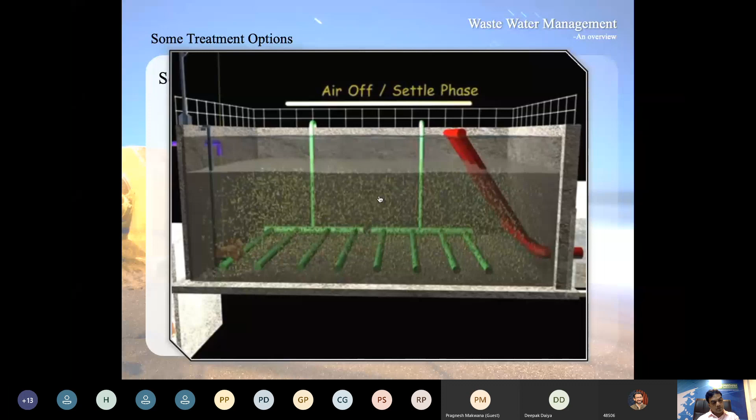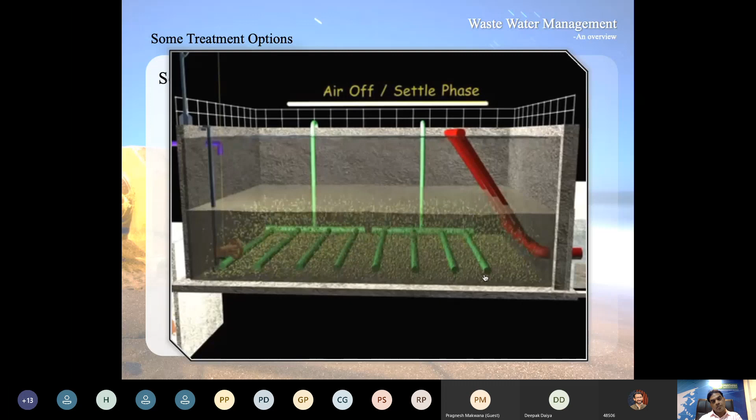Then the decanting phase. So the clear water will go to the other tank, same clear water, and the sludge can be removed.

Now, in the last phase, we come to what the government endorses and also mandates. Why is STP compulsory nowadays and everybody's after STPs, and what are the norms for treatment at sewage treatment plants now?

First case is when the project comes under MOEF approval. A project where the norm is: if the built-up area is more than 20,000 square meters, you have to go for MOEF approval. And in the MOEF approval, the sewage treatment plant is compulsory. So we have to put that.

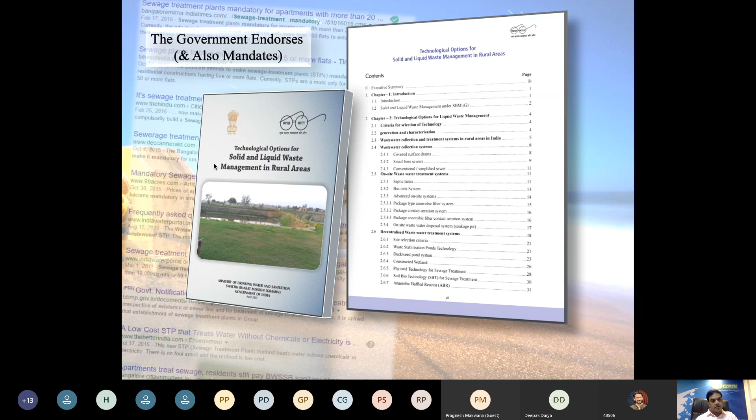The conclusion, in my opinion, is you have to go for a decentralized sewage treatment system, either MBBR or SBR, depending on the space available, depending on your capital cost available and manpower available. To save pollution to the system, as well as to avoid polluting your rivers, so that it will not create any diseases, keep your health good, as well as to conserve the environment. And lastly, to satisfy the government norms, to follow the norms, which is very essential.